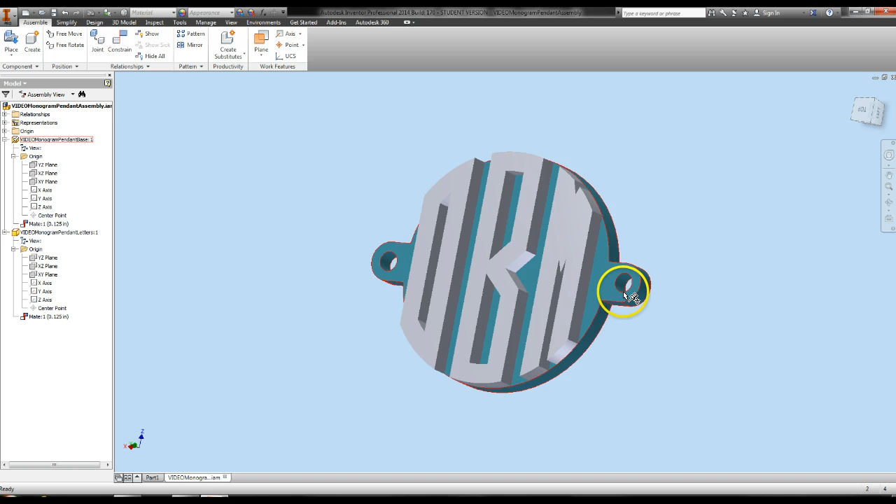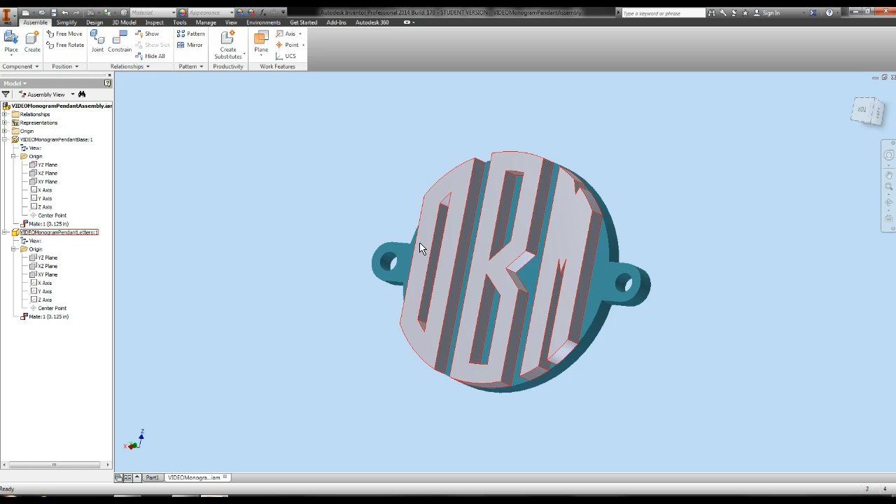So what this is: there's a circular base here, two attachment holes that you could attach a chain to wear as a bracelet, and then these are my personal initials. You may need to customize it if you would like to make your own, but I'm going to show you how to make the DBM, and that's kind of the order monograms go. Just a fun fact, you do the first initial, last initial, and then the middle.

So I already opened up the software and opened a new standard part. If you don't know how to do that, you may need to go back and watch the introduction to Autodesk Inventor Professional 2014 and sketching video if you have trouble getting to this screen.

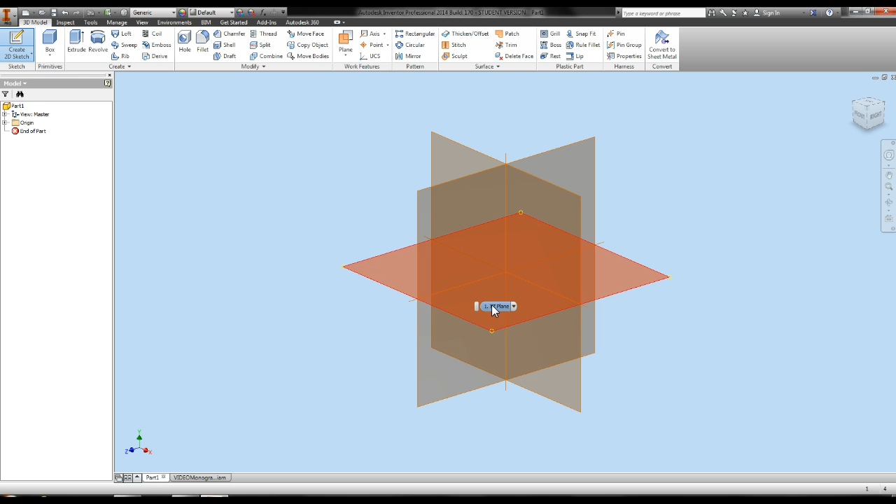So I'm going to go over and I'm going to create a 2D sketch. Then I'm going to pick my plane. I personally am going to pick this XZ plane. If you saw that video, you'll know it'll highlight for me. So this is the XZ. This is personal preference, whatever plane you would like to work on.

I'm kind of thinking about this from a perspective that I want to 3D print this, and I kind of want it on that base, but whatever you want to do is fine. So I'm going to go ahead and select that. As you can see, the cube spun around, and for some reason it always spins it that way so that the top is upside down, but I'm just going to go ahead and leave it like that.

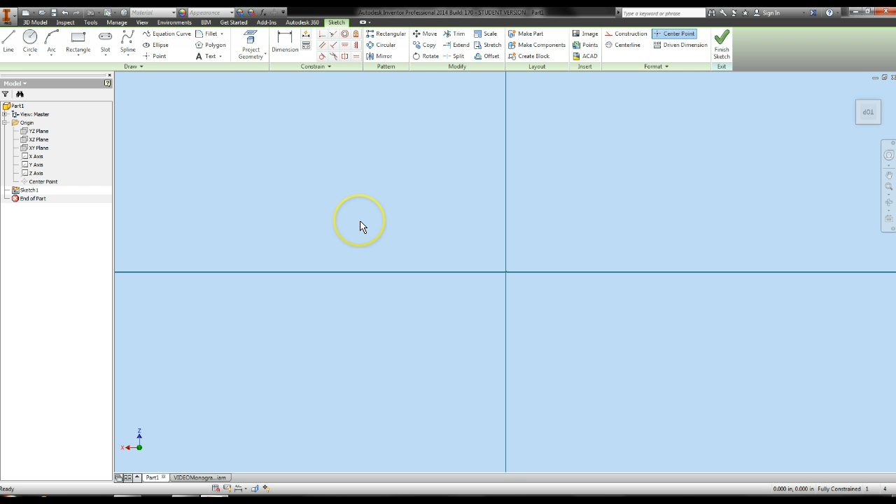So I'm going to go up here, and we're going to start, again, for today's video, just making this base, this kind of turquoise part of this. So we're going to start by just making this big circular center.

So the way we're going to do that is we are going to go up to the circle tab and pull that down and make sure that we are making a circle from a center point. And we want this to be at the origin. We want to have symmetry for this so that when we attach the letters later on, they line up the way we want them to.

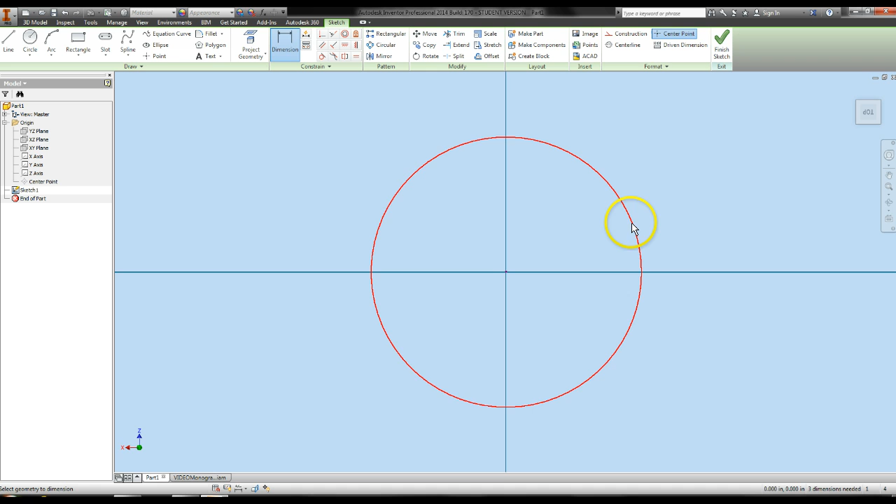So we're going to go ahead, I'm just going to pull that out to a random amount, and then I'm going to go over here to constraints, left click, and dimension this. And I want the diameter of this to be 1.5 inches because I don't want this to be a very big pendant. So I'm going to go ahead and make that, and I'm going to zoom out a little bit so I have a good view of the entire thing.

So you can make this circle whatever size you want. The reason I chose 1.5 is I know I'm going to have to split up this circle into 3 equal pieces of its width for the letters. And I wanted something easily divisible by 3, and 1.5 sounded good to me, and I just kind of like that size for myself. But again, you can go and choose whatever you want.

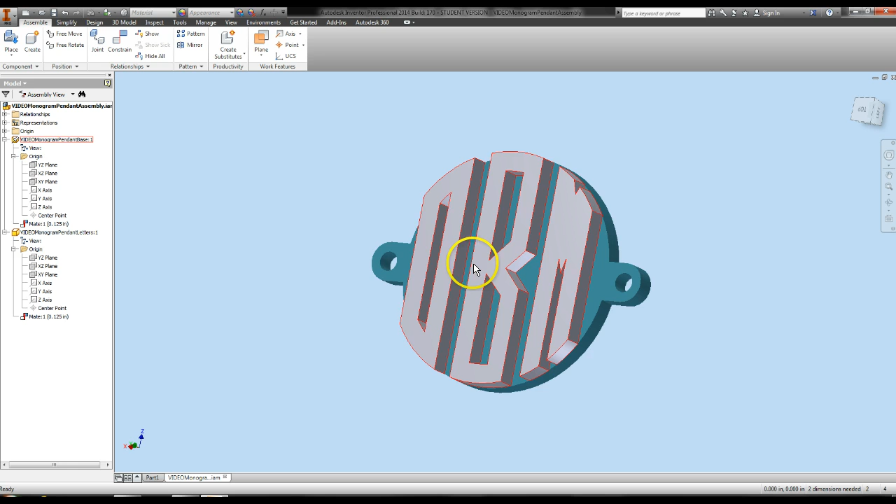So that part's done, and we're already pretty far along. Next what we're going to do is we're going to make the attachment holes. And so we want these holes on both this side and this side. If you maybe want to make this a necklace, you could just make it on top. It's up to you, but again, this is the sketch we're going off of, and there is one on each side.

So we're going to go ahead and do it like that. So I'm going to go back to circle and circle center point. I'm going to hover over here, and as you can see, Autodesk is trying to constrain the point there as soon as I get close to it.

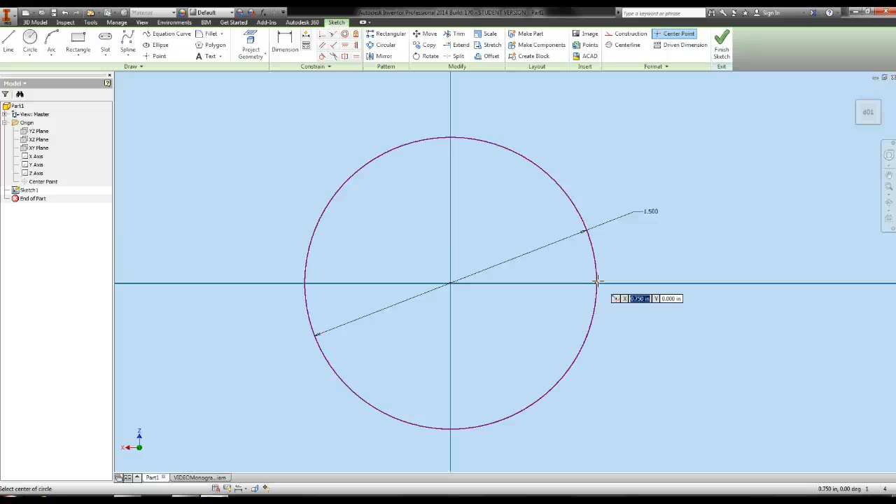So I want to have these attachment holes, the circles of them, to have a diameter of 0.25. So what I'm going to do is I'm going to press tab right here and add 0.125, which is going to be half of the diameter, to this x coordinate. So I'm going to go over, I'm going to press the right arrow key so that it doesn't highlight the whole thing, and just go over to the end and add 0.125. And you'll notice it stops blinking red, and I'm just going to go ahead and press enter.

So I have this center, and again it's going to kind of constrain itself there anyways as soon as I get close to that. So we're going to repeat that on this side, although I'm going to add that 0.125 to the magnitude. So really, I'm going to subtract it here. So I'm going to press tab again and press minus 0.125.

Press enter, and again, we get a circle with a diameter of 0.25. All right, and now as you can see in the sketch, we're going to go back and look at that.

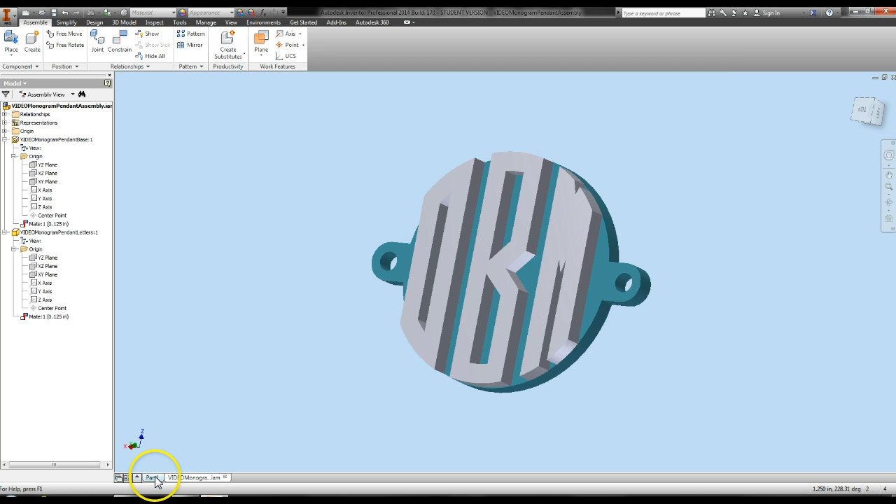These obviously aren't just circles, they're attached with lines. So for the bigger one, we go back to the draw box and press line. We go to the top of one of these circles, and it shows me that's even with the other circle right at the top. I'll left click once, pull my mouse over until it gets close to this circle, and it constrains there. Then I left click again, and that little circle lights up green to show it's constrained to the larger circle.

Then I go down here, and you want to see that vertical dotted line. Again, attach it to the circle, and repeat the same step on the other side.

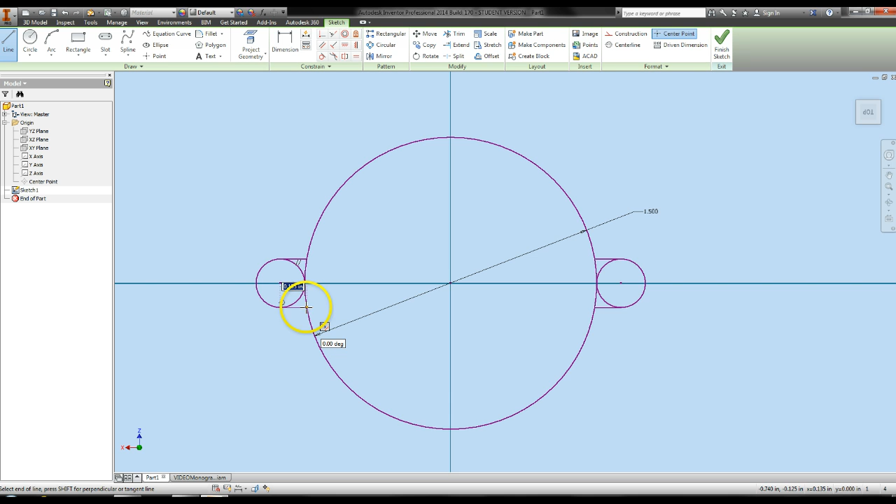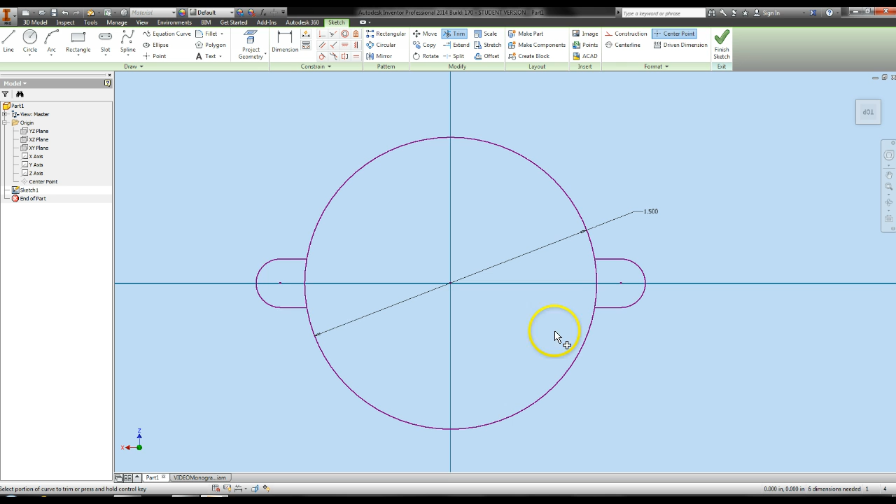So then we want to get rid of the insides. I'm going to select the trim tool by left clicking, and show that that's what I want to trim. I'll left click again, a third time, and finally one more time. Then I also want to get rid of these inner parts here.

Alright, so it's looking a lot like what we want it to look like. I'm going to press escape to get out of the trim tool. But you'll notice, if we go back and see what's next, we want to create these holes here.

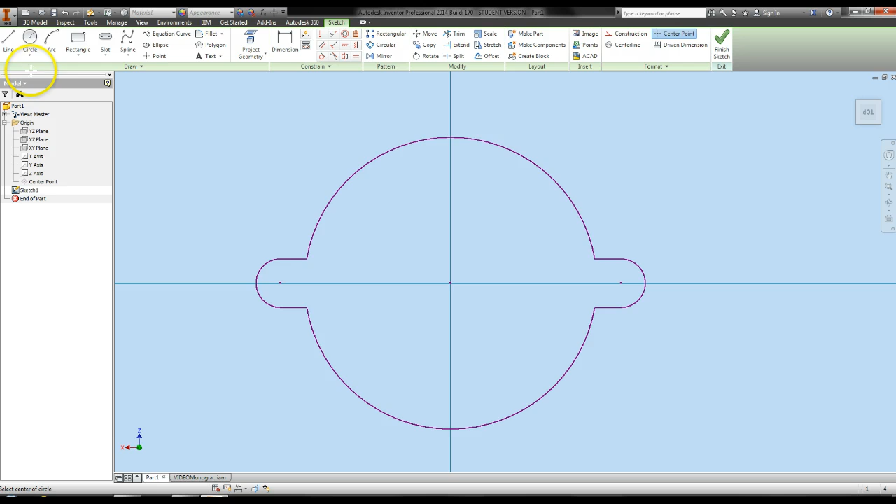There's two ways of doing that. What I think is easiest right now is to create those holes in this sketch first, then I'll go back after we finish the sketch and show a different way. I'm again just going to use a center point to make this circle, and I want the diameter to be 0.125. I'll drag that out, and as you can see, the diameter is already highlighted in blue, so I'll type in 0.125 and press enter.

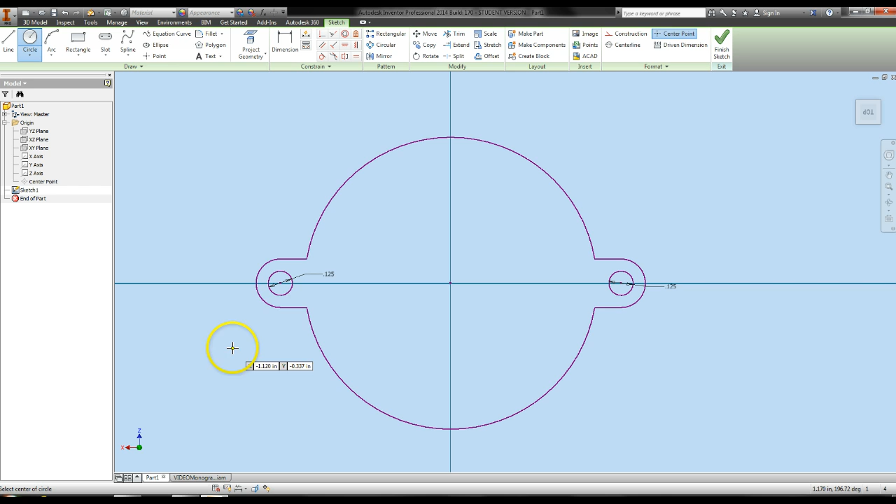And it creates that nice circle for me. I'll do the same thing on the other side, 0.125, enter. And there we go, we have our holes. I'll press escape, or just right click and press OK.

And we have this. So now we can go ahead and finish the sketch, and you can see we're back to this isometric view based on our little cube. We're going to go ahead and extrude this. That's in the create box, and if you hover over, you can press F1 for more help, and you can extrude an image up like that.

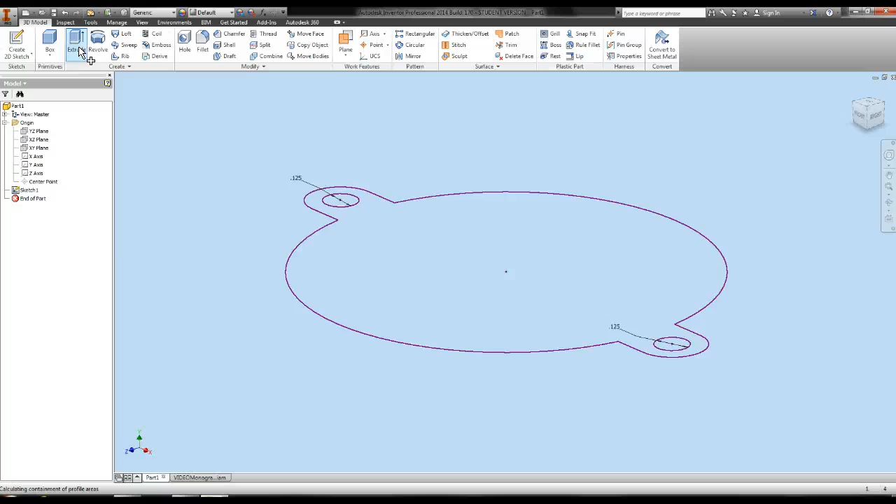I'm going to press this whole region, and as you can see, it's highlighted in red. I'll press that, and then it's asking me how much I want to extrude it. You're only going to want to extrude this a small amount. As you can see, it's not very thick. Let me see if I can get a good view for you.

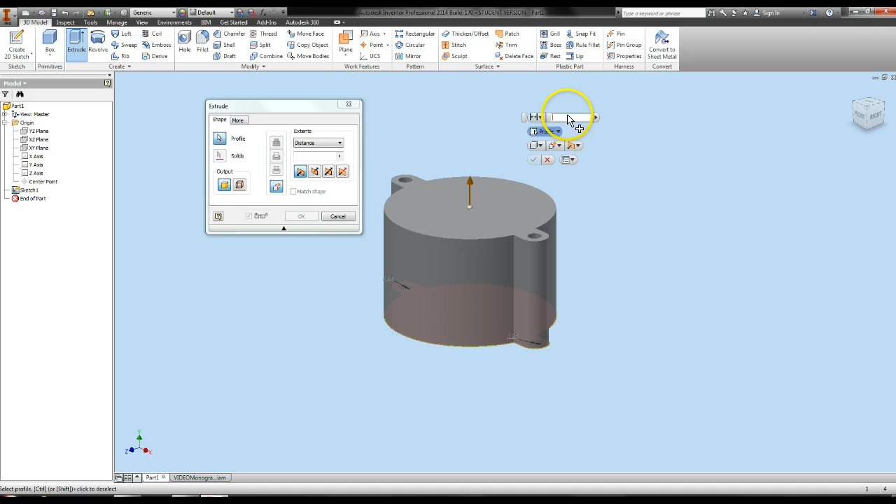You wouldn't want a pendant to be a whole inch, especially considering this height's only going to be half the thickness because you still have the letters to put on top of it. So I'm going to make these—I'll press backspace since I'm already up in this window and make that 0.125. It gives you a preview of that. That looks good to me.

What I'm going to do is—you have all these options of how you want to extrude it: forwards, backwards, symmetrically, asymmetrically. I'm going to do backwards. Usually you want to go for symmetric because that's easiest, particularly in assemblies, but because I'm going to be stacking the letters on top, when I make those letters I'll extrude them up and in assembly mate those planes so that when they come together, they don't overlap each other, which you'll see when we get to that. It's a little hard to explain now without being able to look at it. So I'm just going to say OK.

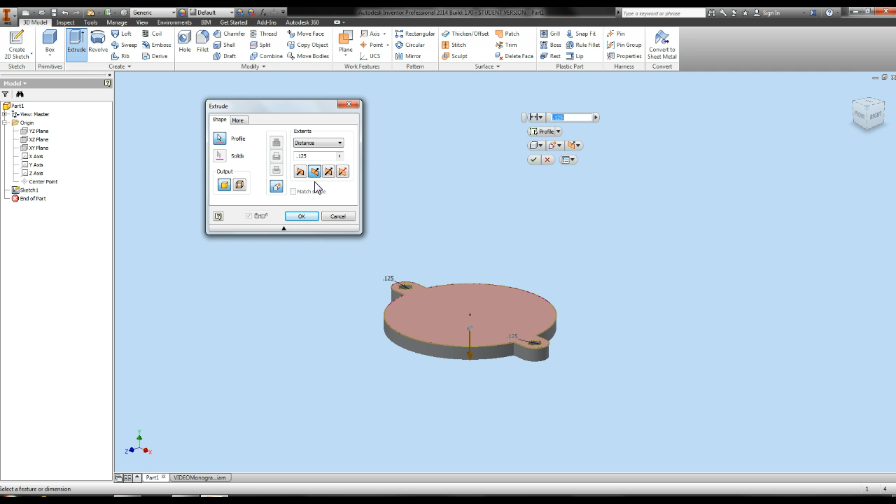And here we have our final base. I'm rotating it with a 3D mouse for you.

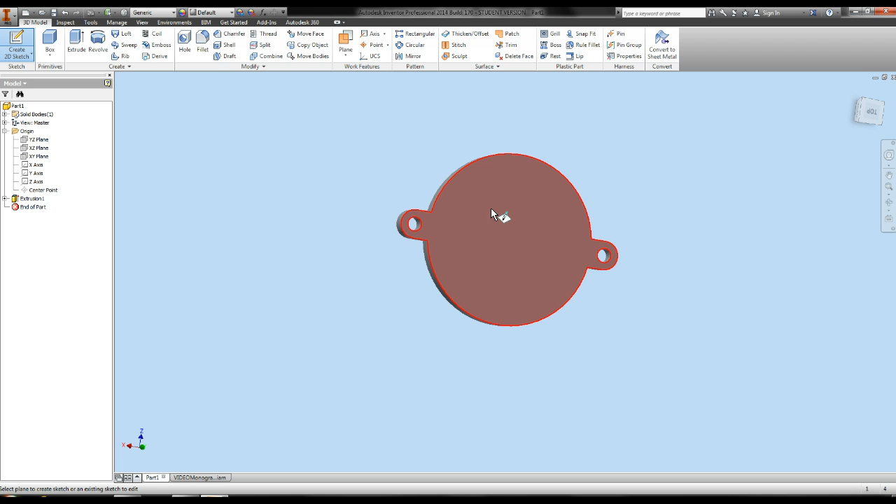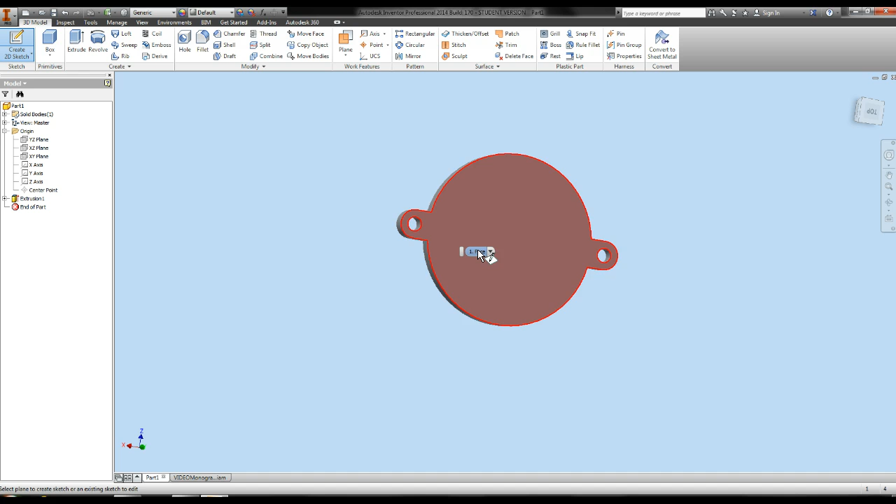So the other way you could have made these holes, I'll go over really quick. You could have not done those in the sketch and just finished it there, and extruded it like this, and it would look exactly like this just without these holes. Then you could create a 2D sketch, press this plane, and project the geometry of this whole outline and the midpoints of those circles you created, and create a hole that way—which I can make a separate video on if you'd like to see. You can use the hole wizard, but it's better to know how to create the holes and how that's actually done first. So that's how you make the base.

I'll show you in the assembly video how to get this cool color onto it and assemble that, and look out for the video on how to make the letters as well.